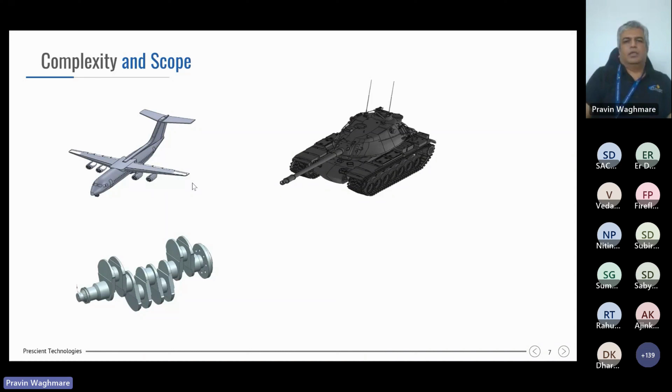Okay, so some more pictures, like of course the planes which we fly are also created on computers. So CAD should be able to create models of that kind, and it does. Or this is basically a tank, or a crankshaft, or a car bumper. So quite complex kinds of geometries we create.

Using CAD, or there could be very simple ones. So there's a crate, there's a soap case, some plastic component, some steel component. So the complexity varies. It could be a very simple part, or it could be as complex as airplanes, or a complex car which we just saw. So that's the kind of complexity CAD should basically address.

And if CAD wants to create models of this kind, the computational geometry also should be able to support mathematics to that level, so that we can create geometries of this kind. So this is basically the kind of scope CAD or computational geometry has in front of them.

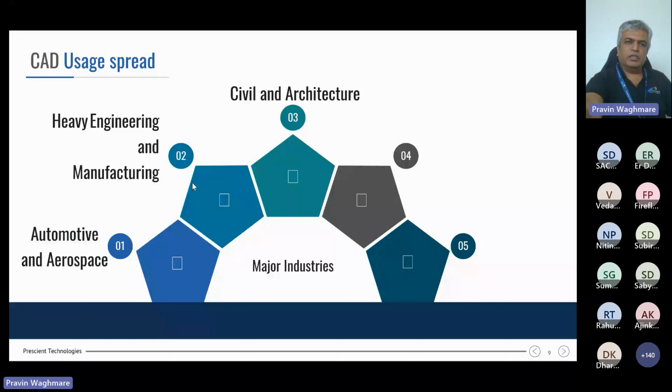So now we know that CAD usage is spread across. Aerospace and automotive, CAD is used - it's an everyday thing. Heavy engineering, manufacturing, civil architecture, we use 3D CAD. Electronics and electrical systems also use 3D CAD at various places. Medical devices, healthcare sector, and so many others. Actually I just put five, but there are so many sectors.

They would like to, for example, even the movie industry, films - they are creating 3D models. So 3D model creation and usage is there in so many businesses. We already know this.

Okay, so now, before we go here, the thing is, we want to create those very complex things, for example a car. A car is an assembly of so many parts that we know. And the assemblies again consist of sub-assemblies, and then sub-assemblies again, and somewhere we have parts and components. So it is important that in any CAD system, we should be able to create those models. And if CAD wants to create those models, the computational geometry should be able to support the creation of those models, those parts. So to discuss this topic, let's start with a very simple model.

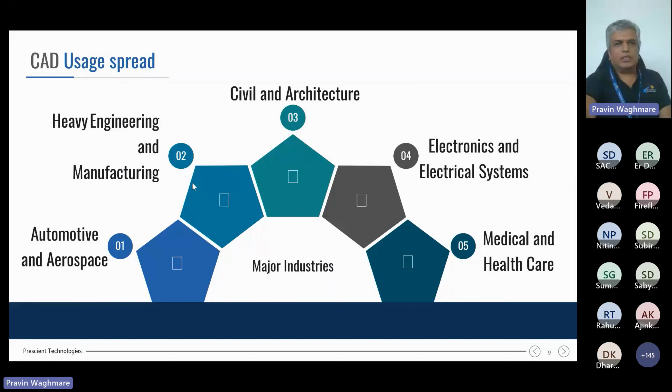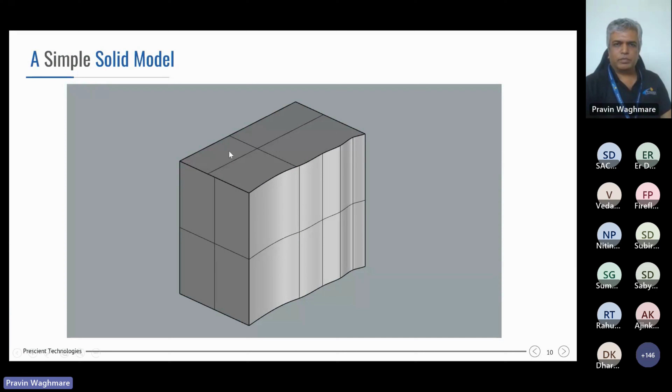It's a simple model. It has one surface which is a bit complicated, but others are planar surfaces - kind of everyday. So this particular CAD model is basically a collection of so many faces. This is one of the faces which we are talking about.

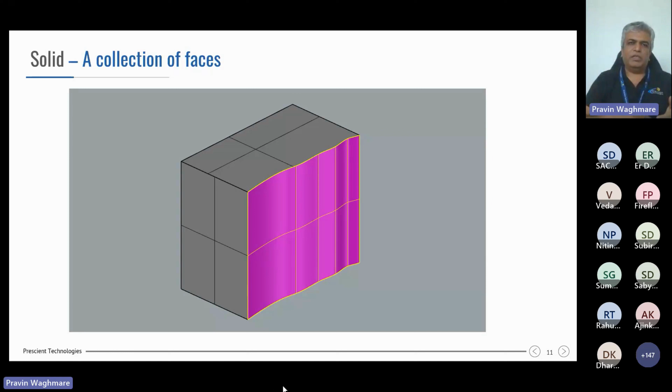So now what we see is that the computational geometry should be able to support, in some mathematical way, a solid of this kind, and it has so many faces as we talked about. So what exactly does it have? Suppose I click on that particular model - it is possible in some CAD systems - and we know that particular face. We call that a face. This is a face, the magenta one.

And this face has an underlying surface below that. This is usually not known to us as a CAD user, but all the faces which we see here have an underlying surface. The underlying surface, I'm calling it an untrimmed surface, so it is not trimmed. So a face has an underlying untrimmed surface.

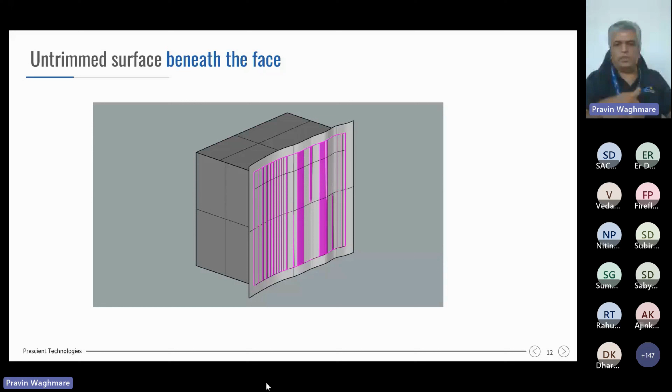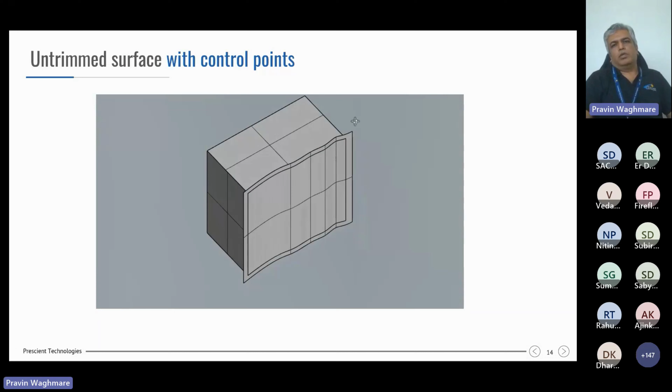So there is a video - I'm just playing a video here. So we just removed that particular model and just created the face. So the face has an underlying surface. This is basically the surface which we are talking about. And what is here now?

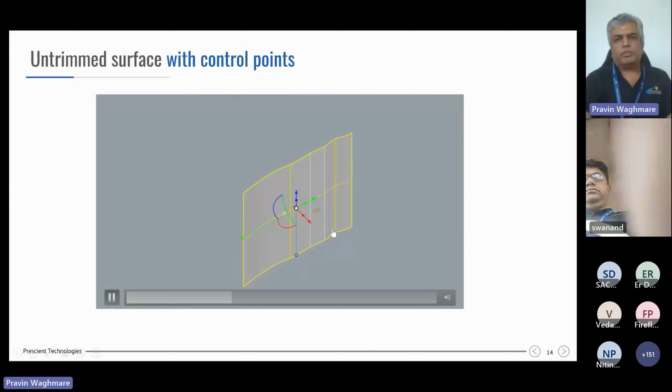So if you look at it, I'll stop it here. Yeah, so this particular surface has some points here, okay, and they are called control points. Again, it is possible in many CAD systems to see the control points of a surface. So what we see here is that we have a surface, and the surface has some control points. We'll talk about what these control points are and what their meaning is and stuff like that.

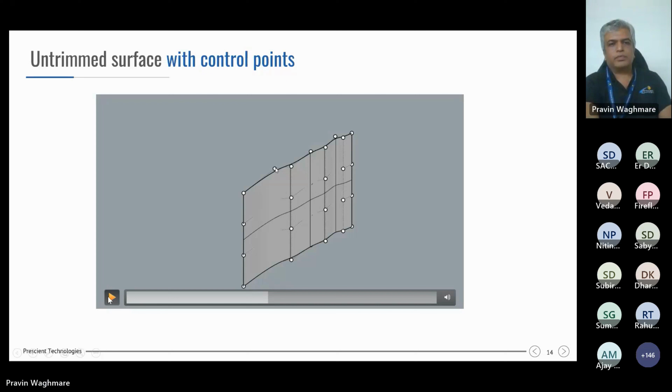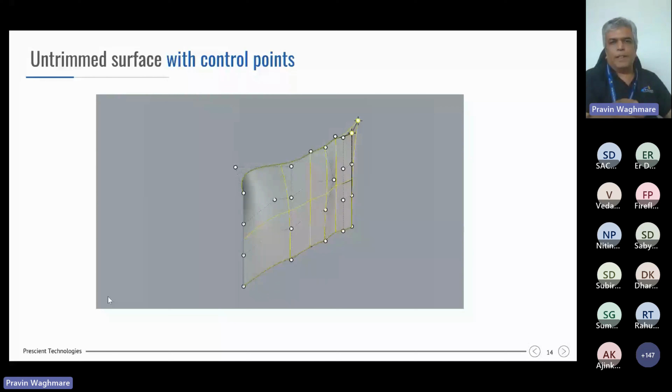If you look at it, here we are just moving those control points and the surface is getting deformed. So what it means is that, from a layman's perspective, these control points are actually controlling the shape of the curve, shape of the surface. As the name suggests, that's what control point means. There are 5 by 4, that is 20 control points, and by pulling those, it is possible to change the surface, which we just saw.

Okay, let's recap a little bit. We are saying that we want to support very complex 3D models, say something like a car, which is basically an assembly of so many parts, or sub-assemblies. The sub-assembly has again so many parts. Then we have parts, and the parts have so many faces. If I go to a particular face, the face has an untrimmed surface below that, and the untrimmed surface is being controlled by some control points. So I just recapped what we saw till now.

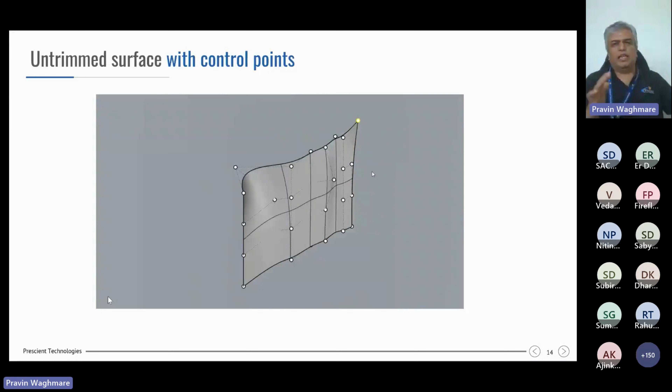So now if a surface has control points, then what exactly happens to the curve? Does the curve also have control points? The answer is yes. Here we are seeing a curve, which also has control points. So now I have a video here again.

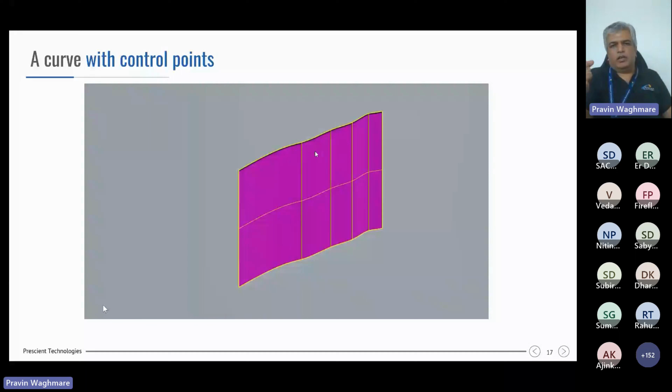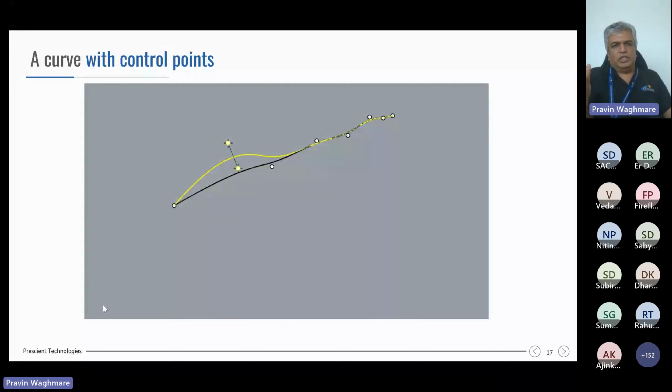So what we did is that, from the surface, on the edge, we just extracted the curve out of it. So this is the curve, and we saw that it also has control points. And if I move the control points, the shape of the curve is changing. So the surface had control points, the untrimmed surface, and similarly, the curve also has control points that we can see.

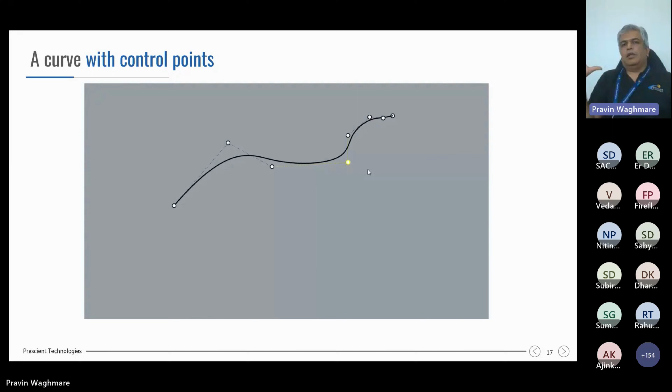So this is basically just to give a glimpse of what is there. When we say a CAD part, what exactly lies beneath? A part has so many faces, and if I go to a face, there is always an untrimmed surface below that. The untrimmed surface has some control points. In that surface, if I want to extract a curve, or just draw a curve, that curve will also have control points, and if I move them, I'm able to change the shape. So I'm changing the shape of the curve or surface using control points. That is how the premise of this computational geometry has been set.

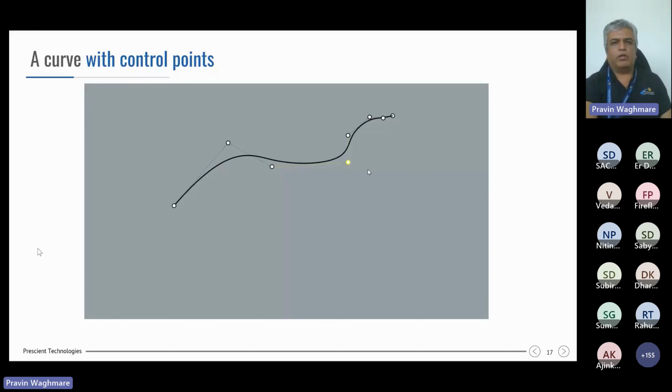So let's see how somebody came to this particular idea of control points and things of that kind. Before the advent of CAD—CAD came quite late, say in the 80s and 90s, it started becoming very popular—but before that, computers came sometime in the 40s or 50s.

You must have seen pictures of computers from those days—they were like big cupboards. IBM was the first company to create computers, and the idea was, okay, so we have something, what all can we do now? We can do some calculations there, but what all can we do?

So one idea was definitely CAE, that is FEM analysis. FEM is a subject you cannot really solve on a notebook, right? It is quite complicated, so you need something like a computer to do the computation. So that was definitely one subject for the computer.

But apart from that, people started thinking about this CAD area. But what was before that?

Before CAD, what we all know is that design used to be represented only through drawings. Even now, design is often represented by drawings, but at that time there was no choice. It was always drawings—various kinds like GA drawings, then detailed part drawings, assembly drawings, and whatnot.

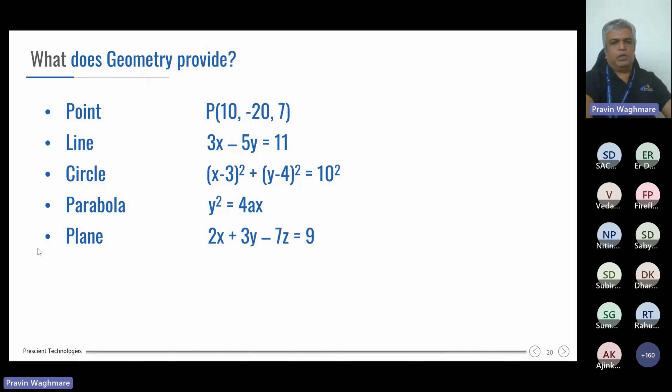We know the equation of a circle, again learned in 11th standard. Parabola, and the plane - it's a 3D plane, so plane is always 3D, of course. It has X, Y, Z components in that. So it's an equation of a plane.

Then we have sphere and cone and hyperboloid and paraboloid and stuff like that - they all have other complex equations, I didn't put it here. So this was all there in the 60s or before that. People knew that we have all that, and we also had some higher degree surfaces, complex surfaces, which people thought could be used.

But there were a lot of problems and challenges in using this geometry just as it is, because we want to create it very easily, and we want to modify it very easily. So that's one thing which was definitely needed.

You all would remember that while drawing in our first year of engineering, there used to be something called a French curve, and we used to use that to draw free form curves, the way we'd like to shape it. So how do we bring equations of those kinds? They are not fitting anywhere here. So how do you basically create free form curves and free form surfaces?

So these were the limitations. The existing representations were not sufficient, and the issue was: how do we handle free-form curves and surfaces? And we need that.

For example, car bonnets, hoods, doors and fenders are not simple, straightforward, planar kind of models. They have complex shapes, and we would like complex shapes so that they become attractive and take care of air resistance. So there was a requirement for free form curves and surfaces, and that could not easily be done using the current state of geometry.

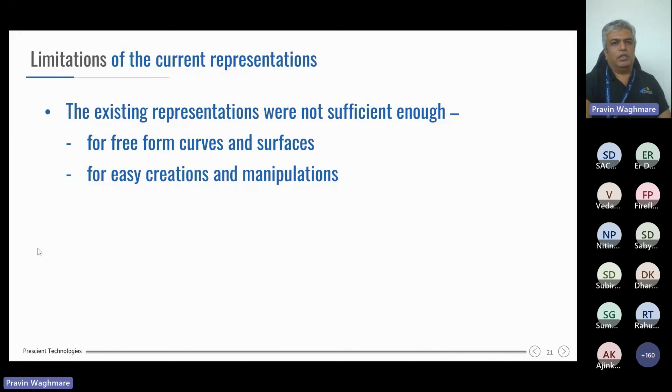And as I said, we needed very easy creation and manipulation. So that was another problem. How would you do that? Suitable representation of geometric entities became a research field. The same geometric entities could be represented in a different manner so that they can be very easily adaptable to CAD-like situations or geometric modeling areas.

So there's this guy called Bezier, or Bezier in French maybe. A French guy, he was working at Renault as an engineer. I think he did that in the late 60s or 70s. He came up with a curve known as the Bezier curve. Pierre Bezier came up with a mathematical form for a curve which would be suitable for geometric modeling.

That was our concern, right? It's not some curve we just create and put in a book. We want to create geometric modeling through such representations. So he came up with a new form of the curve. And what was his thought process?

I'm not sure whether this was Bezier's thought process specifically, this could have been thought of earlier, or could have been put on the table directly - that we should be able to control it very easily with few points. For example, if I draw a curve, the curve has infinite points, right? So I cannot give infinite points to represent my curve. Can I just give few points and get my shape, the initial shape at least? So the concept of control points emerged.

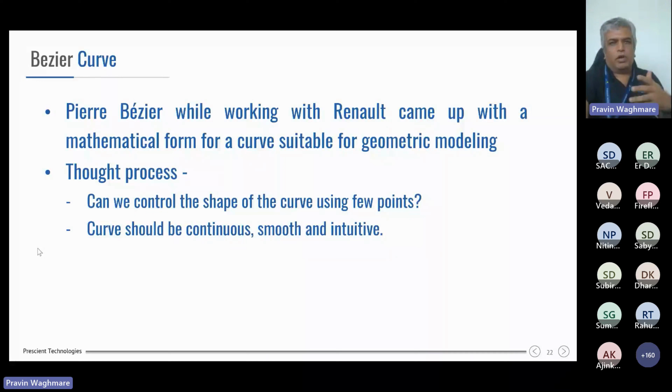Another thing is, if I'm controlling using few points, then it should be intuitive. For example, if there are few points and I created a curve using that, now if I pull that point and the curve modifies somewhere else entirely, the CAD engineer will find a lot of problems - I'm changing something here, but things are happening at a very different location. So it should be very intuitive to the user. These were the kind of thoughts behind creating the Bezier curve.

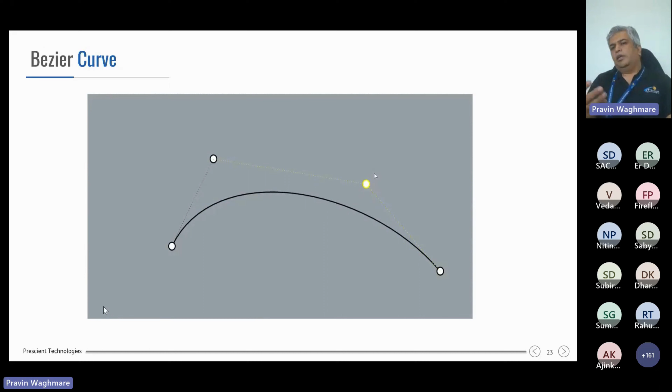For example, he's pulling a control point, and we expect the curve should move accordingly, and it really happens that way, right? If you saw a curve of this kind in the late 60s or early 70s, I'm sure the user would like to see that - okay, I have given few inputs and I'm getting a curve, and at the same time it is behaving the way I would like to see.

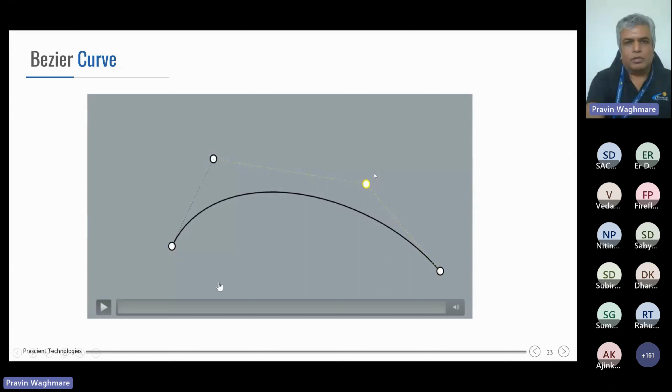And this is why the Bezier Curve became extremely popular. So now let's talk about what Bezier thought, and how he envisaged this particular Bezier curve.

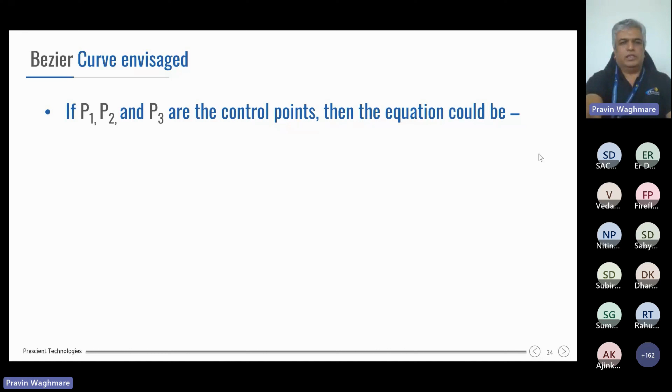So what we're saying here is that we have three control points. It could be n—last time in the last example there were four, but here I've just written three. So for example, I have three control points. Then what Bezier thought is: can I have an equation like this? Just stay with me. So the equation is that...

So I have a control point P1, which is the first control point. I will multiply—sorry, somebody's audio is on, can you please mute it? Okay, so the control points P1, P2, P3 are control points.

So to P1, I'm multiplying with some mathematical function F1. P2, I'm multiplying with some mathematical function F2. P3, I'm multiplying with some mathematical function F3. And if I do that, I get my curve. So this is what Bezier is thinking. F1, F2, F3 are some mathematical functions which we have not talked about yet, but if I can do that, then I can have a Bezier curve. So that's the thought.

Now what will happen if you just look at this particular thing? If I change P1, P will change. If I change P2, P will change. If I change P3, P will change. So by changing P1, P2, P3, I will be able to control my curve. So that was the idea here.

Now some people might be confused, or have a question: P1, P2, P3 are actually points, and can you put points in an equation? We don't actually, right? We can't put a point in the equation. So what is this? It's something like this: it means I will put the x coordinate in the equation and I will get the x coordinate of P. I will put the y coordinate in the equation and get the y coordinate of P. I will put the z coordinate of the control points and get the z coordinate of P.

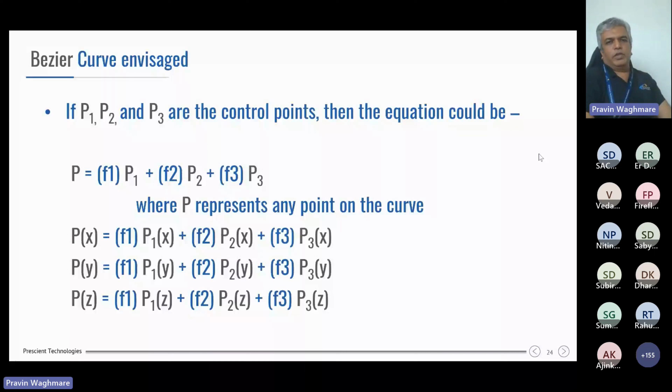So again, let's go back—we are in the 60s and 70s, we are with Bezier, he is doing it for us and we are sitting in front of him. At that time, I'm sure he must be thinking: what are the mathematical functions I have? What are the choices we have? So we know that we have algebraic functions.

This is basically a polynomial function, which is a very special form of algebraic function. Algebraic means, like, square root of x or cube root of x or whatever—they're also called algebraic functions. So we have algebraic functions, trigonometric functions like sine, cos, tan and numerous combinations of them. We have logarithmic functions and exponential functions and stuff like that. So these were the choices available to create our curve equation.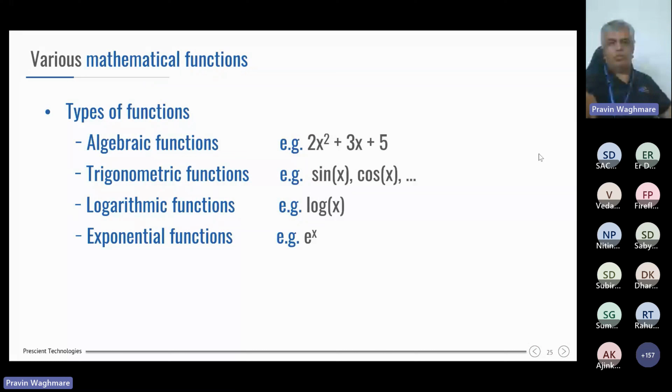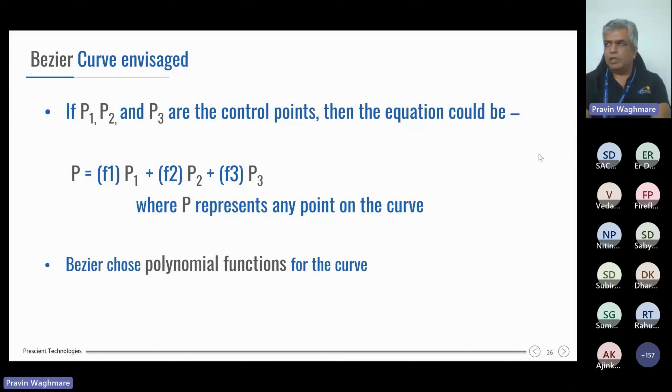So what did he think? Okay, so this is the equation we are talking about: P1, P2, P3, three control points, and F1, F2, F3. We want to decide what F1, F2 and F3 are. So what Bezier chose—he chose polynomial functions. There are reasons why polynomial and not others. One simple answer is: for example, consider the sine function, sine x. Sine x always lies between -1 and 1.

Okay, but we want to create a real life car, so we need to do a lot of jugglery to make sure we go beyond that. If cosec becomes 1 upon sine x, then it is not between -1 and 1, rather it is more than 1 and less than -1. If tan comes in, it can become infinite, or something like that.

So the kind of issues we will get into are not real life issues. We want to design parts which are a few meters, not kilometers. Maybe right now we are, or we can be - there's no problem designing kilometers also, but definitely we are not. We don't want to go into the infinity kind of thing. Nothing intergalactic happening here. We want real life components to be made on CAD.

So the algebraic or polynomial functions really fitted so well, and did not bring further complications, which for example sine and log and other functions would bring in. So he chose polynomial functions.

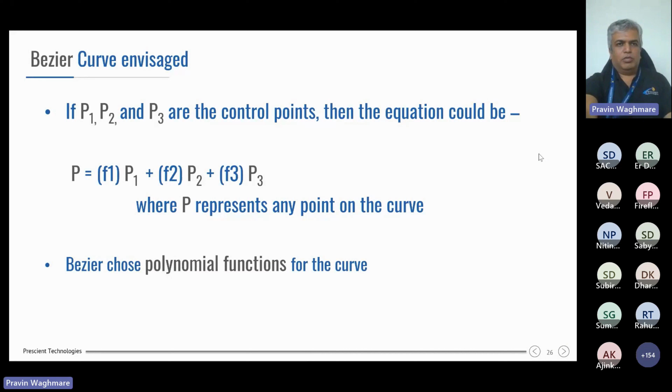Okay, let's go to the next. Again, some recap. We started that we want to design a real life car, for example, on the computers, and we know that a car has so many parts, so many assemblies. In those assemblies, there are so many sub-assemblies. In those sub-assemblies, there are so many parts. If I consider a part, it will have so many faces.

Now I want to design the faces. So every face, I will use curves also to design those faces and stuff like that. So curves and surfaces should be easy to create, easy to manipulate. To easily create and manipulate, we are saying can I give a few control points and start making my curve on my surface. How to create that with few points? How can I create a curve? And that is where Bezier is coming in, and he's talking about the equations.

Just a recap, we're coming from there and we are coming here now up to Bezier equations. So this is basically a Bezier equation. We'll go into details a lot later on. I still have trouble with my computer mouse, but yeah, I'll just play this video.

So here in this case, there are P1 and P2, two control points only, and I'm getting a line here, so which is good. I've given 2 points, and the Bezier equation is giving me a line here. Now if you look at it, P1 we have multiplied by 1 minus t, and P2 we have multiplied by t. The mathematical function which will multiply P1, here it is 1 minus t, and to P2 it is t.

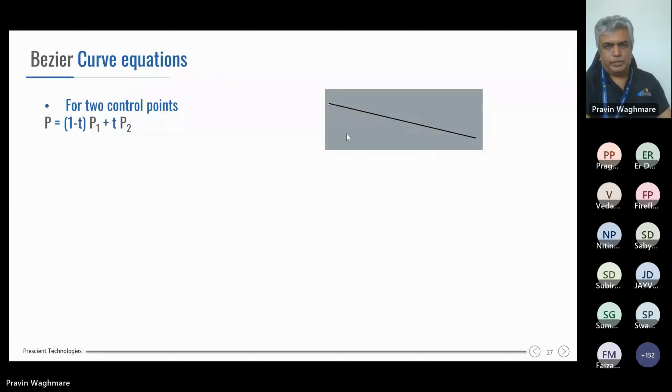Okay, so t is basically a parameter, and that is why it is basically a polynomial in a parametric form - that's what we call it. So t is a parameter, and because of t, we are able to basically trace the entire line. Now this is for 2 control points. Now what happens when there are 3 control points? This is basically another video for 3 control points.

So I got a different curve now. It is not a straight line, of course. It has a curvature, and again, by changing the control points, I'm able to change my shape. And now, if you look at the equation here, there is a square coming. In the first equation there was no square, now the square has come. So what we say is that the first equation was a linear equation, the second equation is a quadratic equation, so it's a degree 2 equation. So with 3 control points, I'm getting a degree 2 equation, and that is why I'm getting this kind of curvature.

Now what happens with 4 control points? The 4 control points have an even more complicated curve, so it has an even better shape, or a little complex shape. Again, the same thing, by changing the control points, I'm able to change my curve. So if you look at it, the mathematical functions we talked about are changing. For 2 control points they were different, for 3 control points they are different, for 4 control points they are different, and every time the degree of the curve is increasing.

So earlier the degree was 1 for the line. When three control points were there, the degree became 2. Now the degree has become 3. So as you add control points, the degree is increasing, and I'm getting a more complicated curve here.

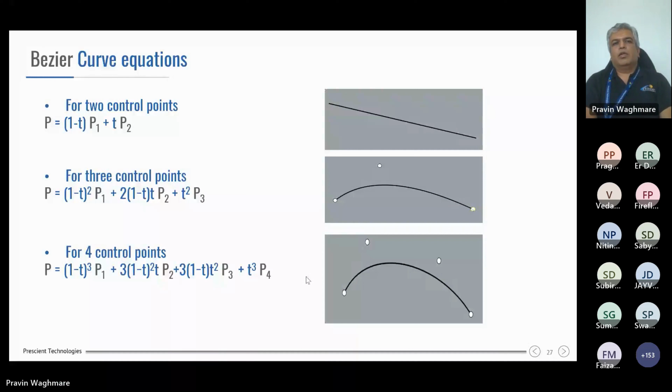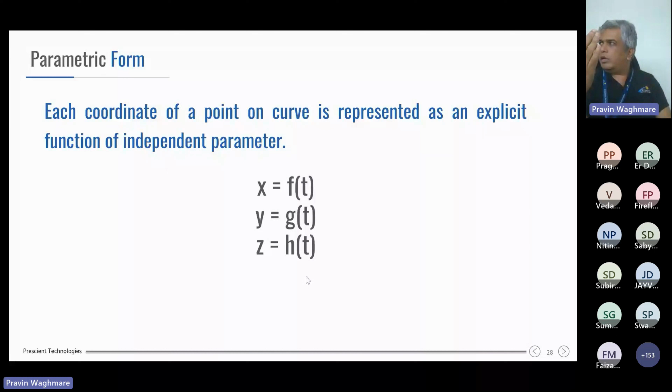Okay, so we just talked about the parametric form. So now what happens? My x, y, and z values, my curve, or any point is now a function of t. I just change t, and I get x, y, z. So if t equals 0.1, I will calculate x at 0.1. With t equal to 0.1 again I'll calculate y and z also, and then I can get my x, y, z point on that particular curve in the space.

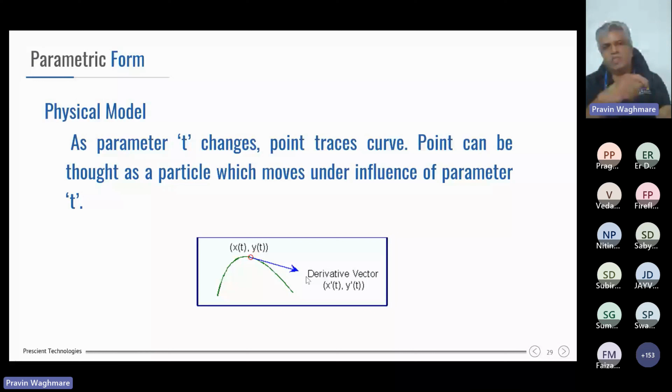Okay, another way to show the parametric form: it just traces the curve. As you change t from 0 to 1, you just keep pulling t, and it traces the curve when you put those values into the equations. So that's basically a parametric form. So Bezier chose polynomials with parametric form.

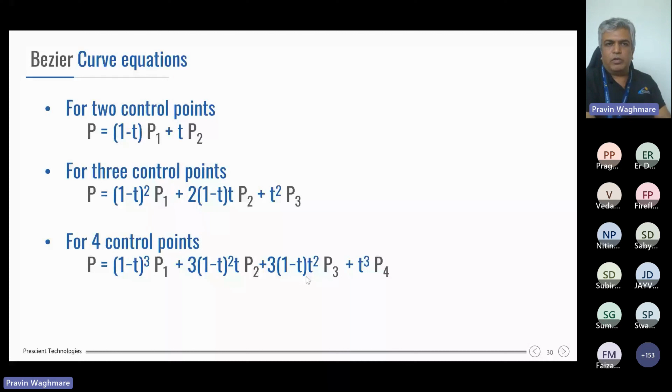So okay, we talked about this: for 2 control points, this equation; for 3 control points, this equation; for 4 control points, this equation, and so on. Now you might ask, suppose I have 50 control points, then what happens? Who is going to give me these equations? Am I going to remember all that and write it somewhere? What is happening here, and how is Bezier deriving new equations every time I just change the number of control points? So how is he arriving at those particular equations? If you are having those kinds of questions, those are very right questions.

So Bezier's actual formula is written like this, okay, and this is a kind of scary-looking thing, and that is why I was keeping it away. It scared me when I first saw this. But remember, this sigma is basically a summation, and this b is basically the function we talked about, and p are my control points. So basically it's a summation of function times control point, plus function times control point, plus function times control point, like that. Let's not worry about the complexity of this particular thing.

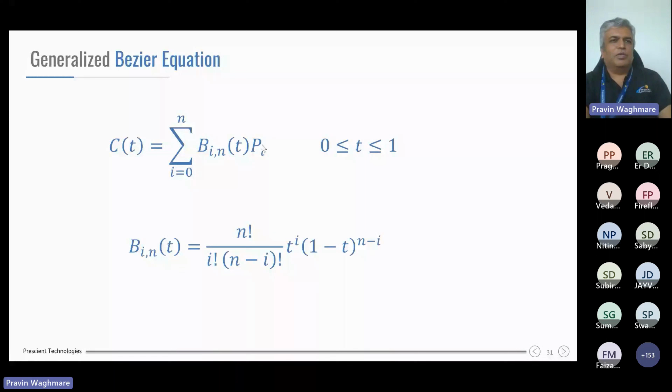So I just wanted to tell you that in the right side equation here, if I put n equal to 1, I get the first equation. If I put n equal to 2, I get the second equation. If I put n equal to 3, I get the third equation, like that. So Bezier came up with this right hand side formula, and using that you can create, for example, a curve with 13 control points, and generate a Bezier curve.

Easy. So put n equal to 13 and solve all this, and you'll get an equation like that, what we are seeing on the left side, and that is your Bezier curve equation. Don't worry about the right side. It looks scary, but the good part is that if I put value of n, it gives me a very simple looking equation.

So that's what the Bezier equations are doing for us. Another interesting thing: all these functions I talked about, like 1 minus t, 1 minus t square, 1 minus t cube, are actually these 'b' things. The b things here are giving me those functions, and Bezier did not create those functions. The mathematician Bernstein had written these polynomials, called Bernstein polynomials. He used Bernstein polynomials and the control point idea, and combined them together to create the Bezier curve.

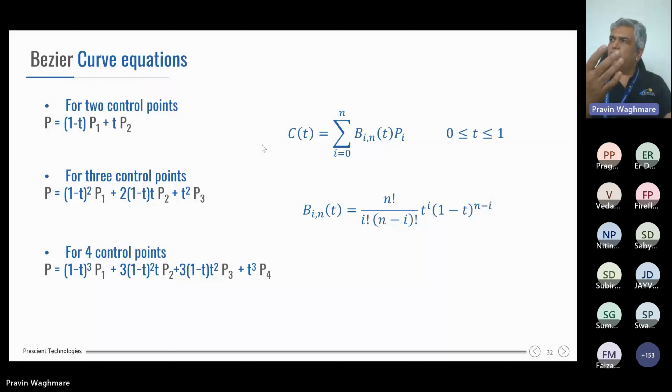You cannot have just any functions - there are some restrictions on the kind of functions you can choose. Bernstein polynomial satisfies that. Let's not get into the details, but the point is that you can't have any kind of polynomial equations. They need to be in a certain way, and Bernstein polynomial was satisfying those criteria. Using that, Bezier created this particular equation. So no new mathematics was created here. It is just a rearrangement of maths.

So again, we can have a look at this Bezier curve, the same video. If I pull the control points, the curve is appropriately getting pulled and pushed. So one thing is that it is giving me control - control is intuitive, and the curve is also very smooth, everything nice. But there are some issues also here.

So there are some issues also here. Somebody's mic is on.

Let me stop somewhere. So I just stopped the video. See what happened: at the second control point, I started moving upwards. But if you look at the Bezier curve, the original curve was the black one, and the yellow one is the new one created because of the movement of the control point. If you notice, I just moved one control point, but it actually modifies the entire curve - except the endpoints, all the points are getting modified.

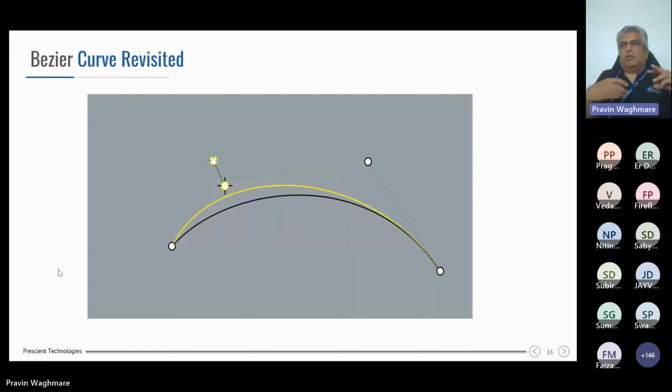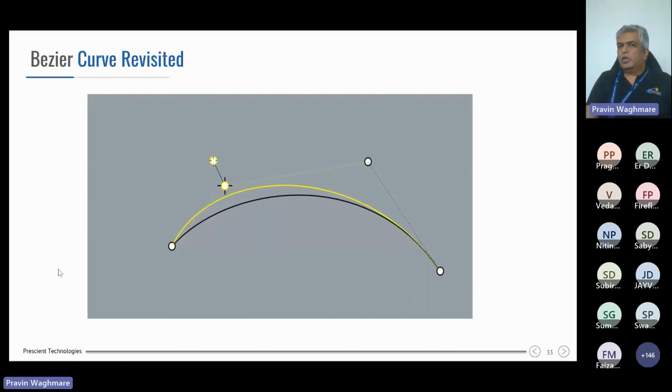So that was the first Bezier issue. The second issue is that if you want to create a more complicated curve, the degree of the curve is bound to increase. When I used 2 points, degree was 1. When I used 3 points, degree was 2. When I used 4 control points, degree was 3. Now suppose I want to create a very long, complicated curve, and I choose 50 control points - the degree will be 49, and that is a very complex curve with lots of wiggles. To manage and control such a curve is not easy, and that is not something a CAD engineer would like to see. So they would like to have local control. Bezier had these kinds of limitations.

So a new curve was thought of somewhere in the 70s, maybe 1974 or something - I could be wrong - and that is called the B-spline curve. We just talked about the Bezier curve limitations: their degree increases with the number of control points, and they lack local control.

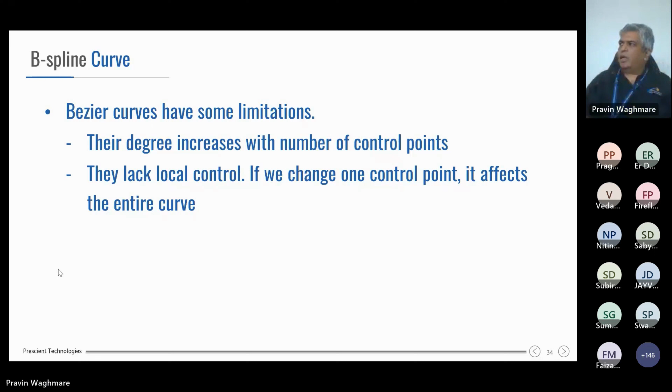So they envisage the B-spline curve. B-spline curve has... I don't have an equation here. It is even scarier than the Bezier equation, so let's not get into that. But the concept is similar: there are control points, and you multiply those control points with some functions, and you get the B-spline curve.

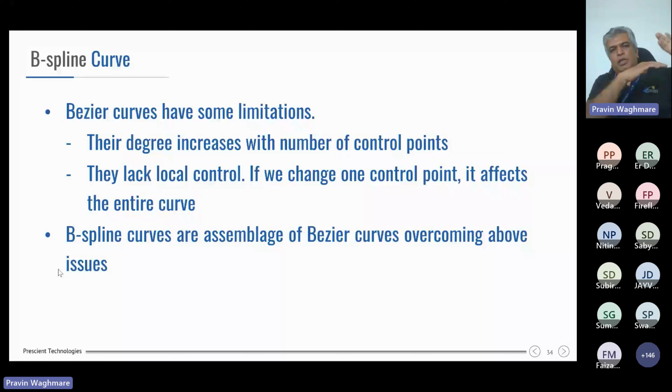Actually, what a B-spline curve really is mathematically is basically an assemblage of Bezier curves. So, for example, you can have a long B-spline curve with 50 control points, but the degree can still be 3 or 4. It will have many spans, and every span is actually a Bezier curve, all connected to each other with very smooth connectivity. Now, if I change some control points here, the spans here get changed, but not here. So I start getting local control.

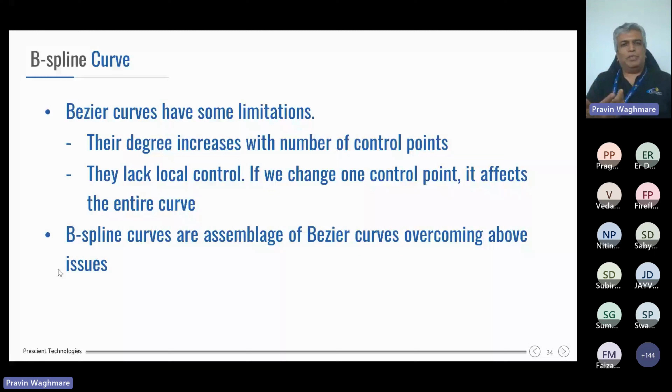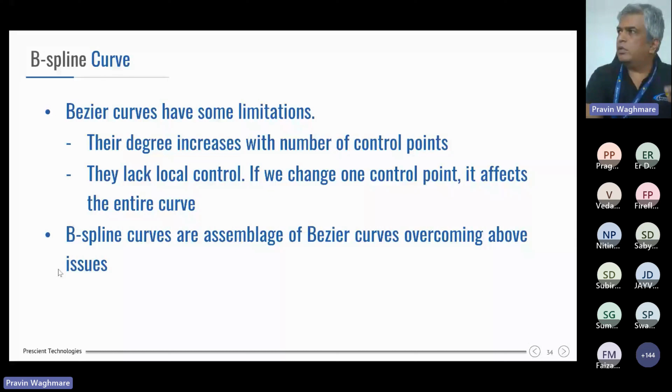So the degree problem is gone, and local control has come up. B-spline curve kind of became a new standard to represent curves. Bezier is not vanished, of course, because every span in the B-spline curve is basically a Bezier curve, and you can always have a Bezier curve as well. So you can say the B-spline is a generalized version of a curve for a CAD user.

Okay, good, but it still has some problems. Using the B-spline curve, I can create that bonnet thing and so many complex geometries, no problem. But I also have circles and ellipses and all those things. So can the B-spline support circle and ellipse, or not? It can do lots of complex things, but it cannot basically represent a circle.

That's the problem. So then a solution came up, called rational B-splines. So B-splines, but which are rational. Forget what the rational thing actually is, but the B-spline became a little complicated, became rational, so that it can start supporting circles also, ellipses also, the bonnet, the hood, the door, those kinds of curves.

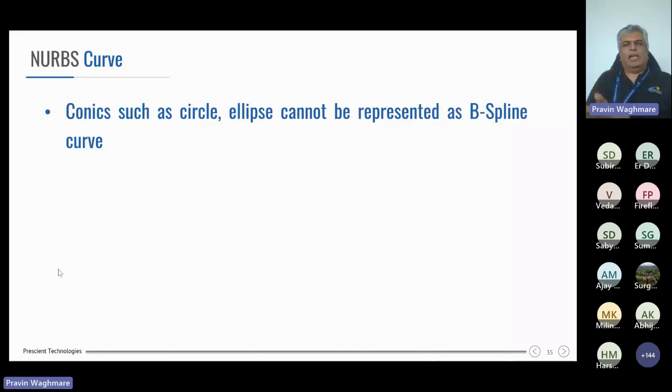And again, there is something called non-uniform rational B-spline, or NURBS, which adds still more complexity, but now we are able to do all kinds of curves whatever we need. NURBS are basically a further generalization of rational B-splines. Rational B-splines are a generalization of B-splines. B-splines are an assemblage of Bezier curves. Bezier curve means control points and some functions. So that particular theme remains the same.

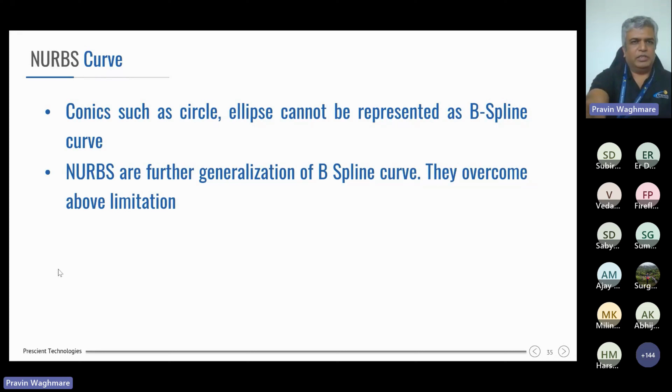So, as I said, they are further generalizations and they overcome the limitations and things like that. So, okay, all the curves which we generally see in CAD are represented using NURBS.

Okay, so we talked about curves, but what about surfaces? Finally, we are not interested in curves, we are interested in surfaces. A bonnet or hood is a surface, a car door is a surface, they are not really just curves. So luckily, whatever mathematics we have developed so far, the equations of surfaces are very similar to the equations of curves. So thank you so much, Bezier, or all those people.

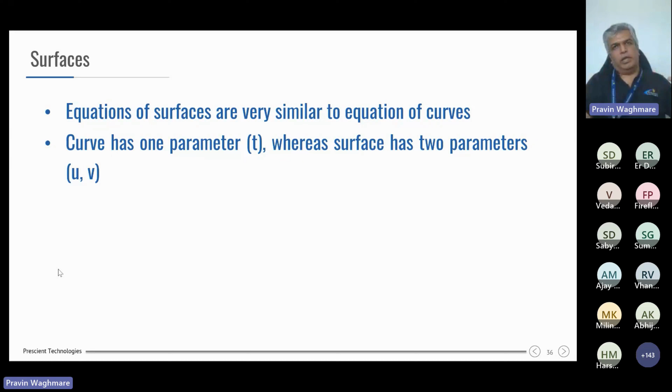So in the curve, we had one parameter, t, and by changing t, we could trace the curve. Now here we have two parameters, one is u, another is v. So by changing u or changing v, I can basically trace my surface now. By changing t, I was tracing my entire curve, but now by changing u and v, I can trace the entire surface.

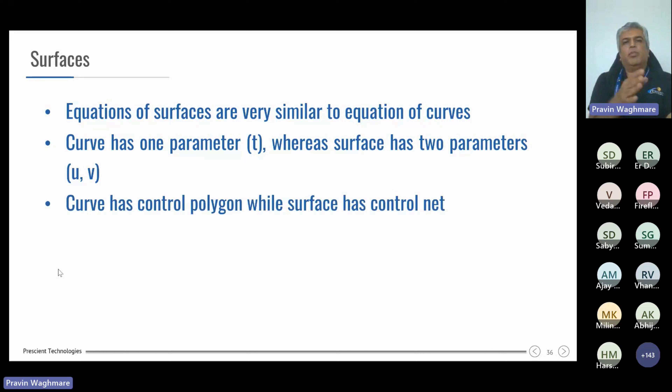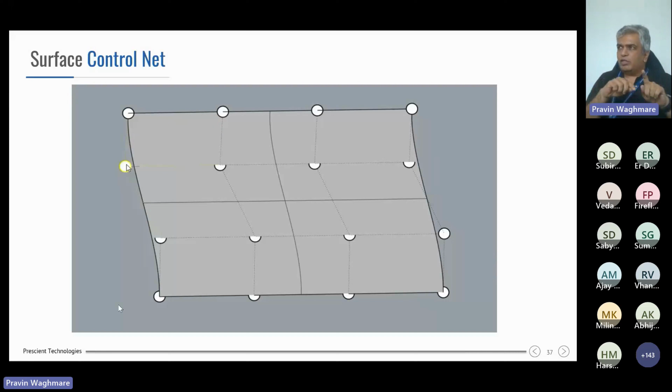So likewise, as we had B-spline and Bezier curves, similarly we have Bezier surface, B-spline surface, NURBS curve, and NURBS surface. Earlier it was just one parameter, now there are 2 parameters, and because of the 2 parameters, the shape is like, it's not a rectangle, but it always has 4 boundaries. A surface always has 4 boundaries because it moves in 2 directions - it moves in the u direction and in the v direction, so it always comes with 4 boundaries.

So the same mathematical representation which we talked about is getting extended to surfaces very easily. Again, I'm not putting equations here, because they are very scary, so let's not worry about that. But we understand what they would mean and what they are representing.

Okay, so this is surface control. Now coming back to our problem, all this mathematics, all this jugglery, we are doing it to solve CAD problems. We want to basically create CAD models.

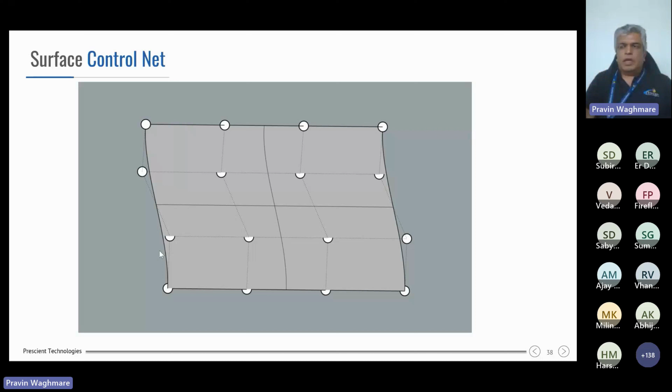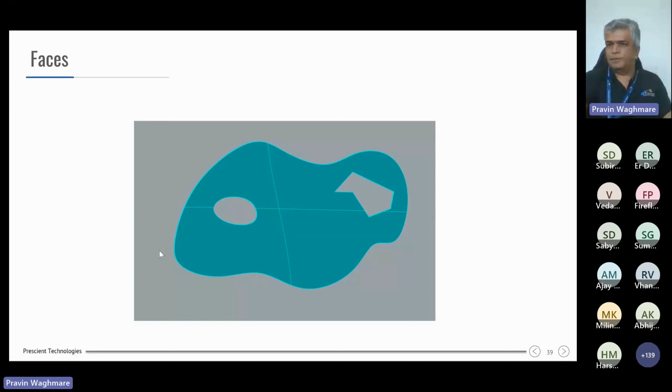So what do we do now? NURBS and whatever mathematics we talked about is all talking about 2 by 2 - the 4 boundaries limitation is there. Now, what should we do here? So what they say is that this is how actually the faces are created.

So faces are always trimmed surfaces. If you remember, to start with, I showed you one face, and then I showed you there is an underlying surface. So every face has an underlying surface. This particular face also has an underlying surface, which is gray now. And on that underlying surface, it could be a Bezier surface or B-spline surface, it will have mathematical equations, which we talked about.

And on that surface, we have a trimming boundary. So this boundary actually runs - the boundary is another curve, and again, that curve could be Bezier or B-spline curve. This curve actually runs on top of the surface. And we say that this outer boundary means my boundary of the face.

So there is no mathematics here, just topological information. It says, okay, I have this particular surface which has a B-spline equation, and now there is an outer boundary. The outer boundary says that all the points which are inside are my face, all the points outside, I'm not interested. Now there are inner boundaries also, there are holes also. So holes say that all the surface points lying inside that particular loop, inner boundary, I'm not interested - that is a hole. Outside, I'm interested. So by this topological information, I'm actually creating the face information.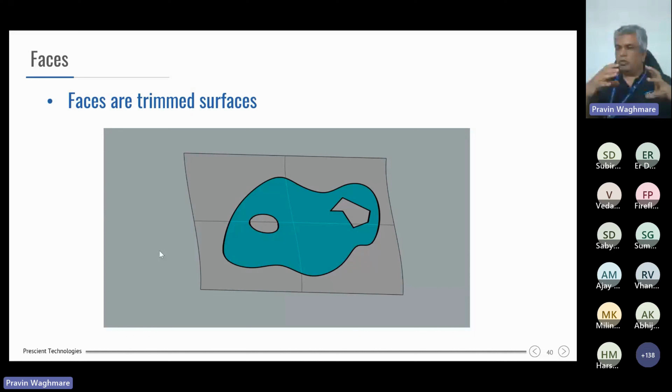So face doesn't have a mathematical equation. Surface has a mathematical equation. Face doesn't. Face has, on top of a mathematically defined surface, trimming boundaries - outer boundaries and inner boundaries. And using those outer boundaries and inner boundaries, I'm defining my faces.

Okay, so again, coming back to the CAD model which we talked about. So now this particular solid, what is that? It has so many faces, and all these faces are connected. So we talked about surface, we talked about face, but now there is an additional thing here. There are two different surfaces and they are connected to each other. So what about that? Somebody should know who is connected to whom.

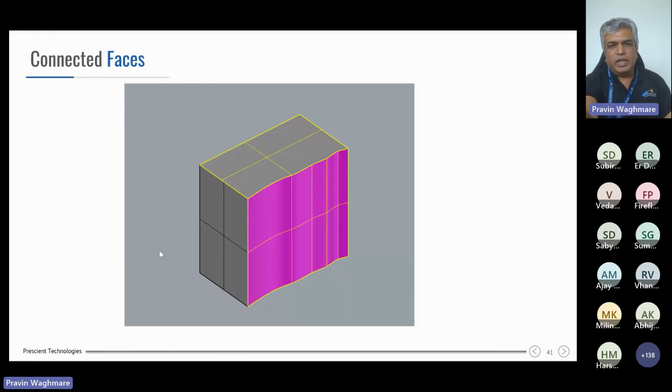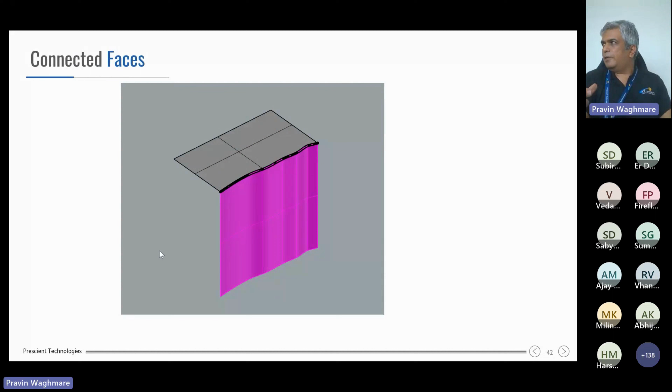So that's the next remaining problem. So here we have selected some two faces, the top face and the magenta face, and so they are here. Now what happens is that there are two connected faces. They are sharing a boundary here. Okay, the black is sharing a boundary. They're sharing a boundary here.

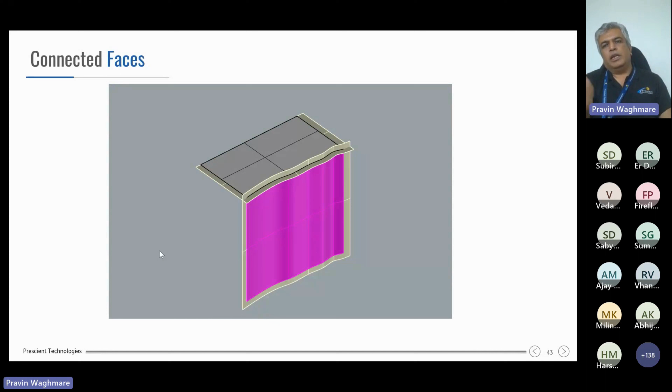And what actually happens is something like this: the top face will have some underlying surface, and on that underlying surface, there is a trimming boundary. On the vertical face, the magenta face also has an underlying surface, and on that underlying surface, there is a trimming boundary. In that trimming boundary, there is some portion that these two guys are sharing. And this information is kept inside - it tells who is connected to whom and stuff like that.

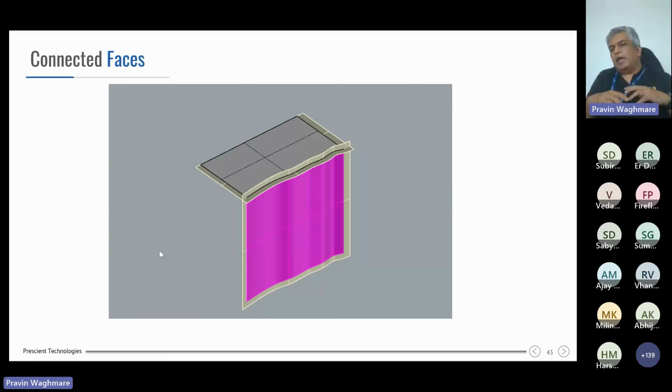And now I have all the information to create a solid. See, now if I want to create this particular solid, there are 6 faces. So every face will have some surface below, and every face will have a trimming boundary. The trimming boundaries - some portion of my trimming boundary will say that this portion is connected to that face, this portion is connected to that face, this portion is connected to that face. Now with all this information, I can represent my model.

Okay, so again, recap everything. We are talking about creating big cars, and big cars will have sub-assemblies, and then again sub-assemblies, and then some parts. The parts are of this nature, and the parts will have faces.

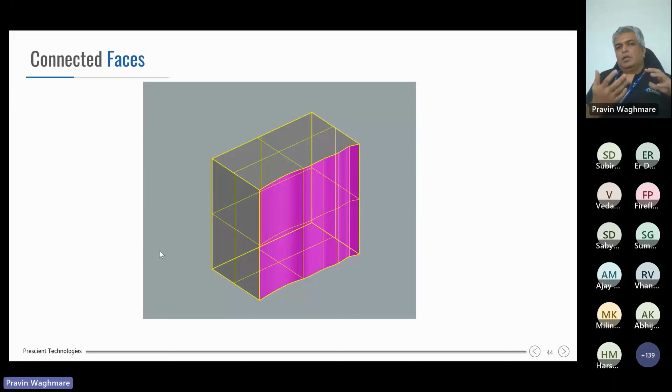The faces will have underlying surfaces. Underlying surfaces will have control points so that they can be controlled, using the mathematical equations we talked about. But the underlying surfaces are always four-sided.

My faces may not be four-sided, so I need to have trimming boundaries so I can create a face. But one face doesn't mean everything. The face is connected to some other faces, so I need the connectivity information. So I keep the connectivity information, and by doing that, I create my model.

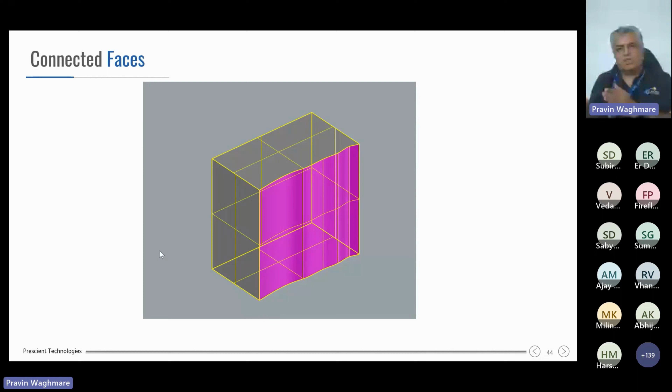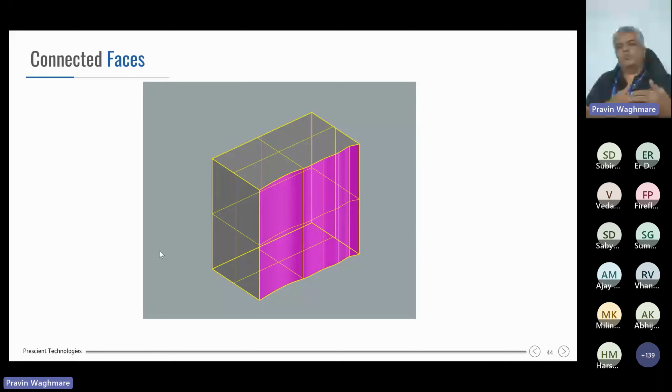So all this information together means the model, which is below, whatever we are seeing inside the software is actually having all this information behind. So yeah, that's what our model was.

As we talked about, the connected faces are the trim faces, and they're sharing common trimming edges. You might have heard this word - this is called boundary representation, or B-rep. So they say that this particular CAD software supports B-rep, meaning it does all this.

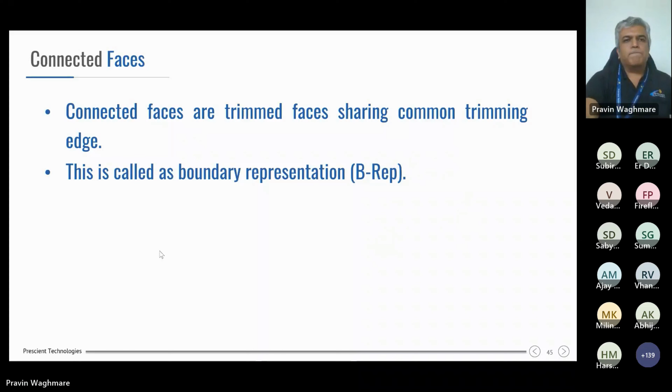There could be outer trimming boundaries. There could be some inner trimming boundaries, which are holes, and they will have some connectivity information. Using that, we have created this model, and we call this a surface model because this is not a solid - the edges below or on the side are free edges. They are not connected anywhere. So this is basically a surface model, not a solid.

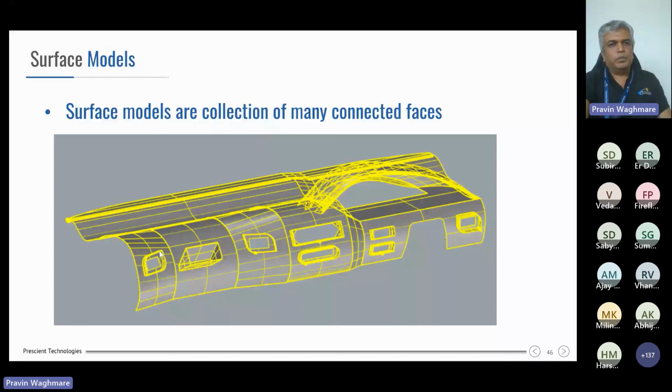Okay, but using the same B-rep, I can basically create this particular surface model. Sometimes the whole thing could be just connected to each other.

The difference between the earlier model and this model was there is no free edge, and there are no self-intersections either. By doing that, we can say that this is a solid, and with some more information, we can conclude that, oh, this is definitely a solid.

So solid and surface model, not much of a difference. The only difference is that everything is connected here, and it basically closes a volume. There are some free edges, but the underlying representation is similar.

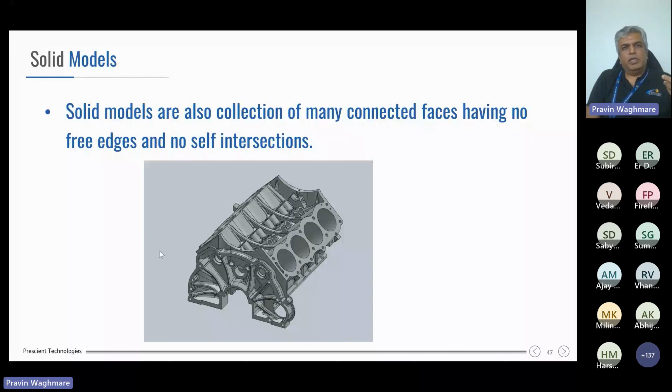So whenever you see CAD on your screen or any 3D model like that, you can say that it has so many faces, meaning every face will have some underlying surface. The underlying surface will have some control points, some degree or something.

An underlying surface will always have four boundaries, but my face may not have four boundaries. It can have a complicated trimming edge. It can have some holes, and every face has connectivity information - I'm connected to this guy, I'm connected to that guy, like that. And all this information in its entirety makes the model inside.

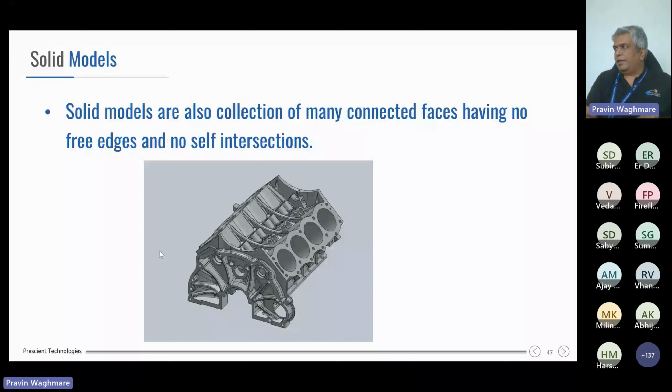So thank you so much. This is what I wanted to cover, by keeping math as low as possible, as minimum as possible, but wanted to give a glimpse of what exactly lies beneath, what is exactly there inside when I see a CAD model. So thank you so much, and if you have any questions, please go ahead and ask.